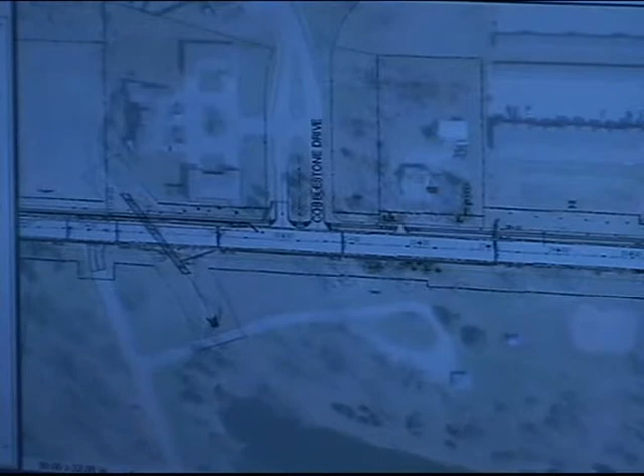There'll also be a new water main installed. Again, the old water main runs along the old alignment of Colorado Street. A new water main will be put in place along the new alignment, extending just east of Cobblestone Drive, then cutting back to tie into the existing Muscatine Power and Water main. Muscatine Power and Water had incurred a fair amount of water main breaks in this corridor, so that's one of the reasons they wanted to replace the main as well.

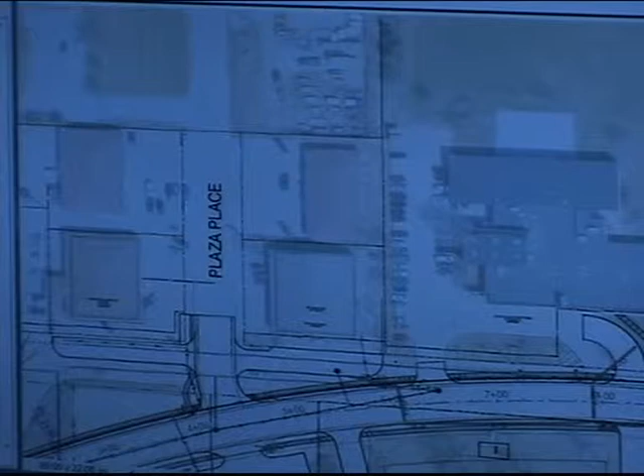One of the things we looked at in the design of this project was the multimodal aspects, the complete streets aspects of the project. That was a high priority with city staff, and we wanted to balance that against acquiring additional right-of-way and other things.

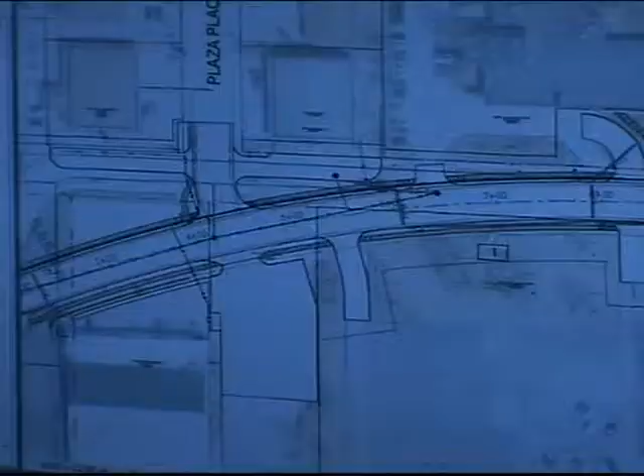As part of the project, there'll be a new 5-foot sidewalk on the north side, extending from Park Avenue all the way down to about 300 feet west of University Drive. That new sidewalk will serve pedestrians, connect to the Running River Trail, and be available for the more novice or inexperienced cyclists. More experienced cyclists can ride in Colorado Street, and with the wider section, should have more ability to have vehicles pass around them.

A new bus stop will be added right here at the end of the walk near Colorado Park, and I believe there's a fair amount of multifamily housing to the north of there.

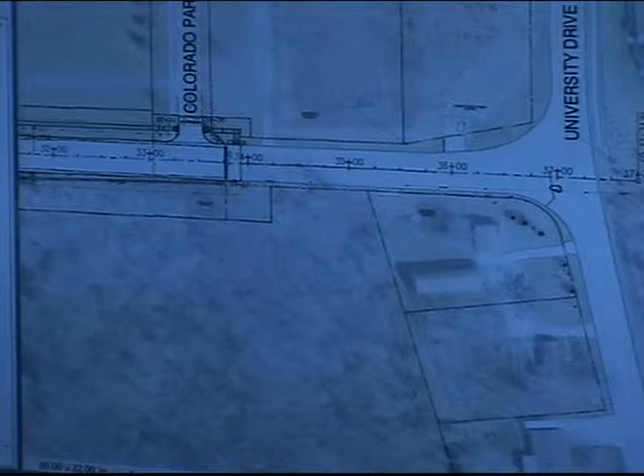I have a question related to the sidewalk, if you don't mind at this point? No, go ahead. Why are we stopping the sidewalk 300 feet from University?

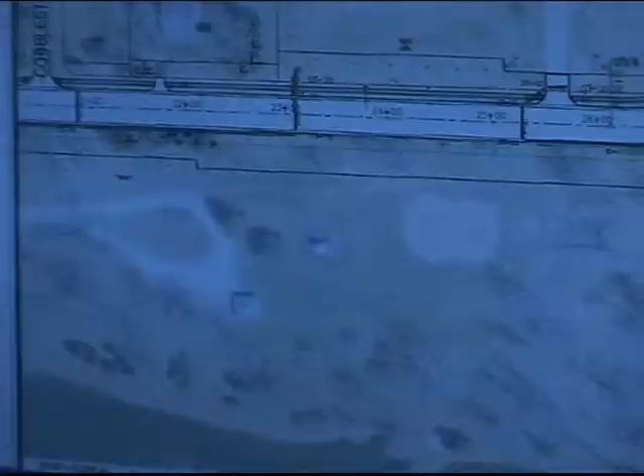Isn't there some sidewalk on University already? Is it just spotty? Basically it doesn't go anyplace, and we're trying to watch our costs as much as possible. We feel like when that area is developed on that corner, the developer will go ahead and finish extending the sidewalk in front of their property. Similarly, we at one time considered putting in signage at the entrance to Weed Park, a nice signage entrance, but we cut that out to try to keep our costs down on this project.

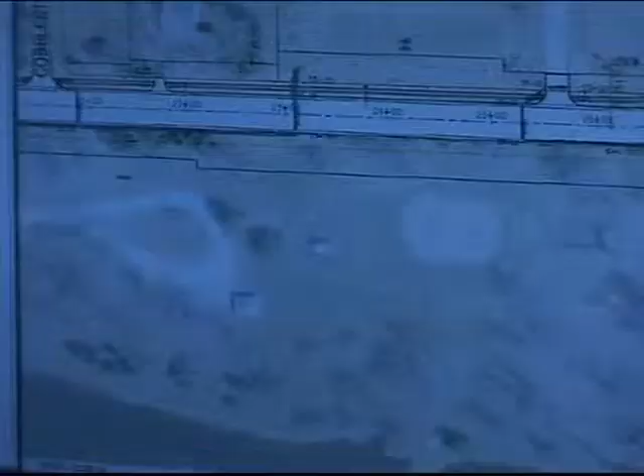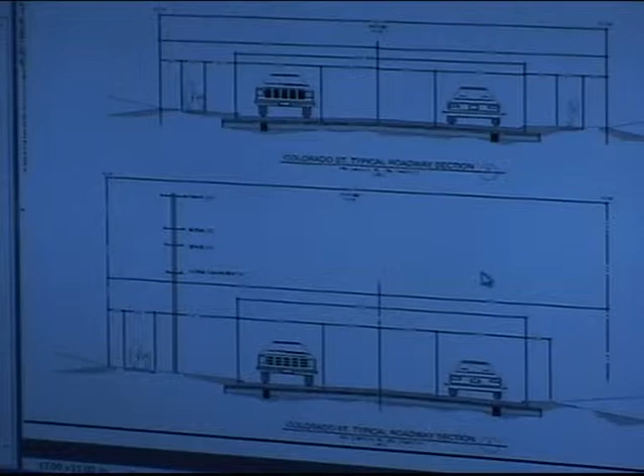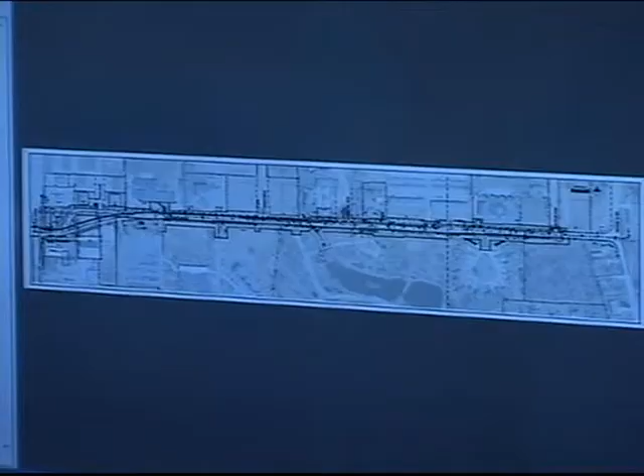I'll talk a little about how we anticipate the project will be phased during construction. There's always the possibility that a contractor may come in and say, because of the equipment I have, or I've got a way I think I can do this faster, if you let me do this or that—so there are always those kinds of discussions that can occur once a contractor is on board. But we want to make sure that what we're designing is buildable, so we give them a suggestion on how they can phase it so everybody has an opportunity to bid it the same way.

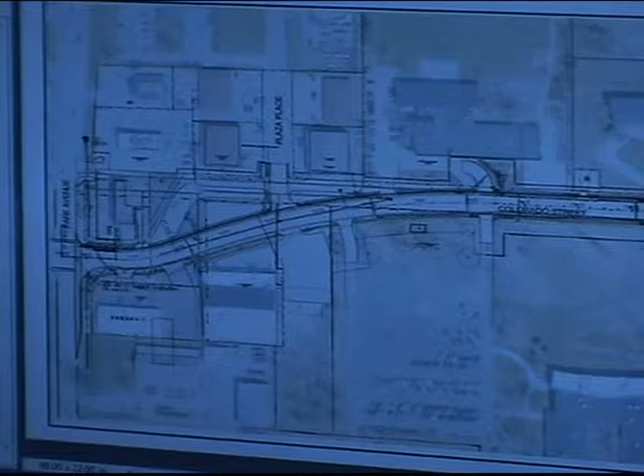What we propose is Phase 1, which could potentially start this fall, allowing for relocation of utilities and work off the shoulders of the road for building. As you get beyond the urban section that's in place now and go further east, where it's a 2-lane rural section, there'll be a need to fill in the ditches and build out into Weed Park.

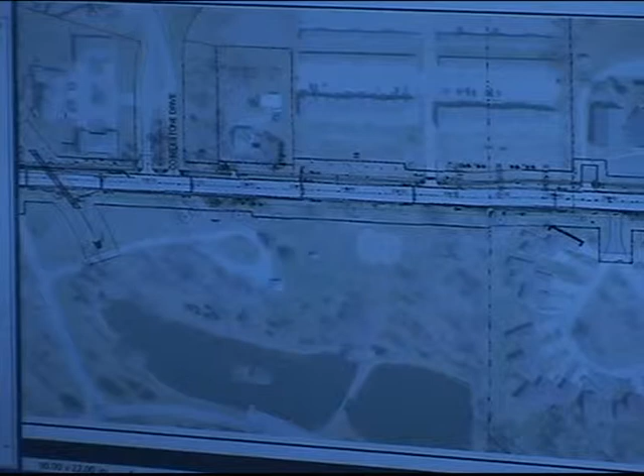The thought is that this work can occur anytime during the project, and we think the contractor will want to get into it as early as he can, since there's a need to widen the road for the new 3-lane section. So that's what we anticipate for Phase 1—utility relocation and off-the-shoulder work.

Phase 2 is installation of the box culvert, coming into Weed Park. We're anticipating about 14 days for that installation. What we're putting in is a precast box culvert, as opposed to a cast-in-place box culvert. So once the contractor is on board, he can talk to his supplier, have them pre-manufacture the box culvert, bring it to the site, open up the roadway, put it in, and close it back up and get out of there—versus a cast-in-place box culvert, which would take much longer. But during installation of that box culvert, there will be a need to close Colorado Street.

People will still have access for everyone, but they just won't be able to go straight through. People on the east side of the box culvert will have to come in off of University. People on the west side will have to come in off of Park.

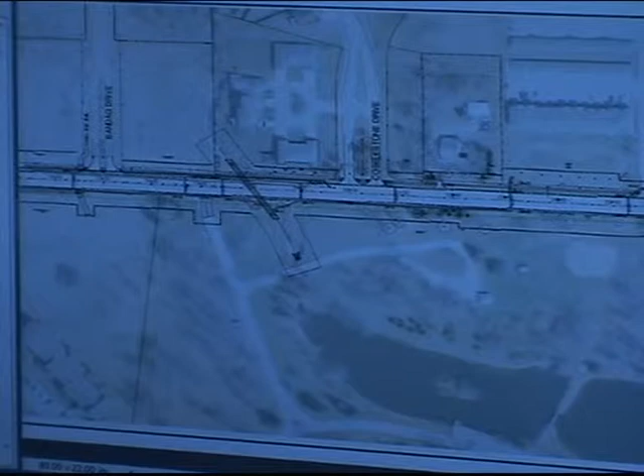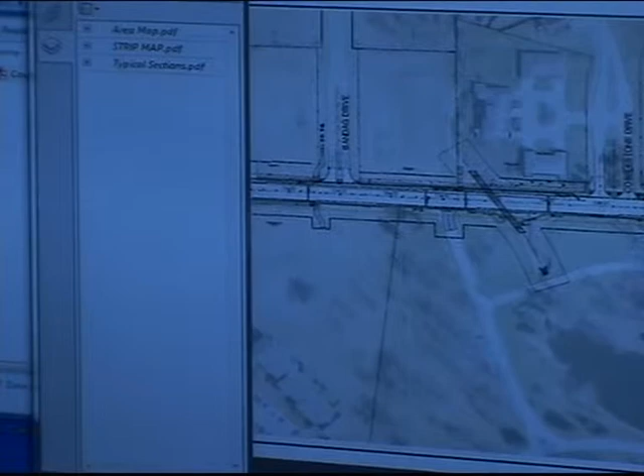Phase 3, which we anticipate occurring—let me grab that and slide it over.

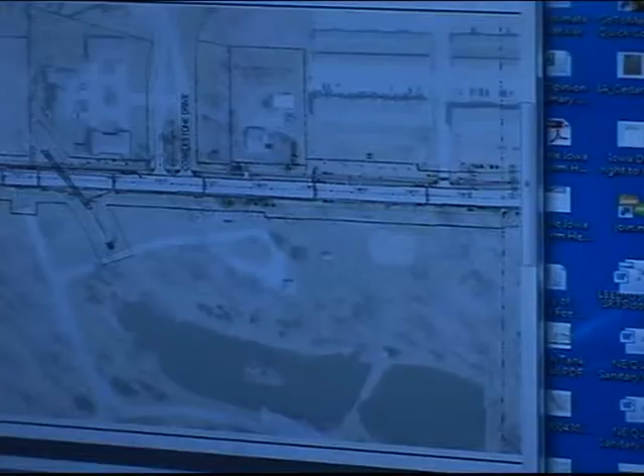We anticipate Phase 3 occurring in the spring of 2014, constructing the work from Park Avenue to Plaza Place. During that time, we again anticipate closure of Colorado Street between Park and Plaza. Access to all businesses would still be available, either off of Park, as in the case of the Come and Go or the Meineke, while the Plaza Place businesses would go up to Harrison, come back down Plaza Place, and get in that way. Pierce Furniture would also come around and access across that area.

Phase 4 would be the next phase, basically in front of the Colorado Street School. What we're calling for is that this work be done when school is out of session. It would start just before the old alignment of Colorado, if you will, grabbing it from around this point, and take it just to the east of the Colorado School.

During that time period, we anticipate the detour coming on the Colorado Street portion that's been constructed, up Plaza Place, over to Harrison, and back down on Bandag Drive. At the same time, people could go up Park and over to Harrison and down Bandag as well.

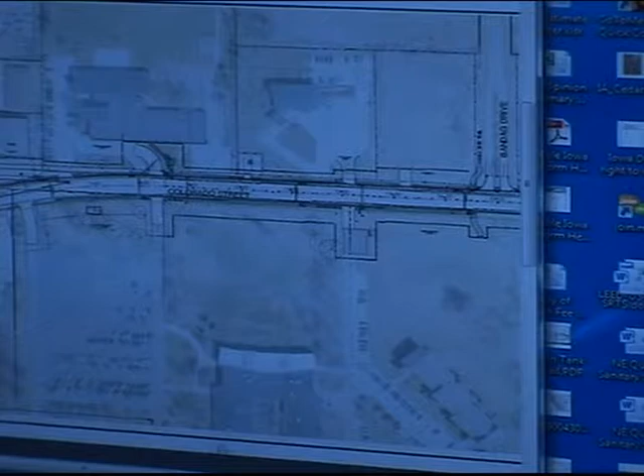Phase 5 is then the portion from just east of the Colorado School to the end of the project, to University Drive. We're anticipating they will construct the south half first and add some additional pavement on the north half, about 5 to 6 feet, to allow for two-lane traffic on that north half while they construct the south half.

During that time, we anticipate posting the road as closed to through traffic, local traffic only. We'd like to see the through traffic go down University to Washington, and then take Washington back up to Park. Any traffic we can get off there that really doesn't need to be on there would be a good thing.

Phase 6 will be the north side, and at that time there'll be two-way traffic allowed on the south side of the new roadway. Again, we would anticipate the same detour for through traffic.

Then Phase 7, which I'm not sure I have listed here, we anticipate as kind of that stop island right at the very end of the project at University Drive.

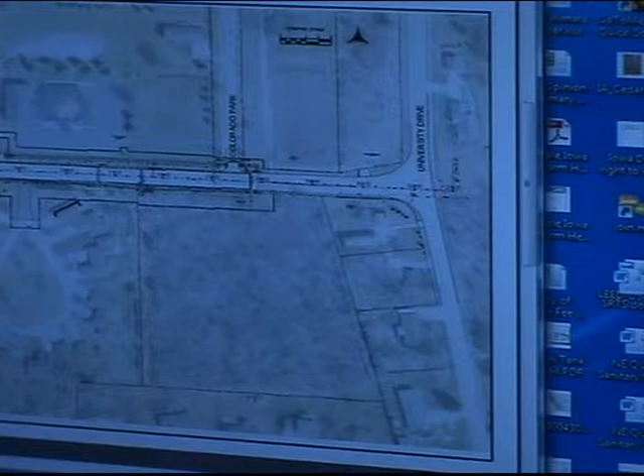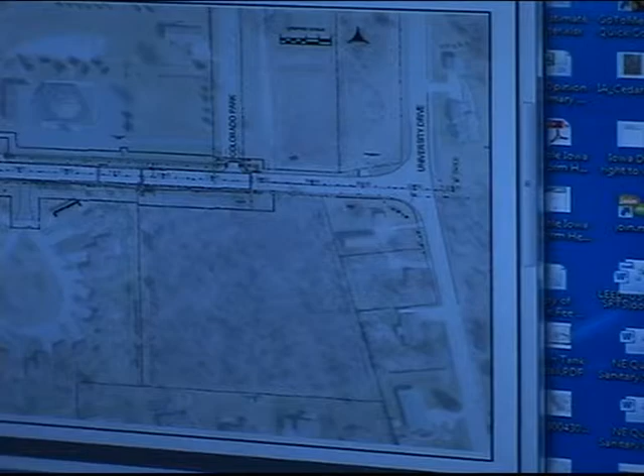The last page on my cheat notes here is the project statistics. Right now we anticipate the cost to be $2.95 million. That breaks down to the city's portion at $1.4 million, $1.2 million being contributed by federal aid the city has received, and we anticipate the water cost to be about $320,000 at this point in time.

We're hoping to have a letting in September of 2013. We have plans into the DOT and are awaiting their comments at this point. They've indicated this is a more complicated project than they typically see—they're more used to, I'll say, rural highway type projects. But our last communication with them has been the September letting, and we're on board for that.

With that, I guess I'd like to open it up for questions or comments.

What's going to happen to the bend that we're straightening out, so to speak? Does what's currently there become green space? There are a couple different options—one is green space, the second is to sell it to the adjacent property owners. Not all of it is ours; this grayed out section is private property, just this one parcel right in through here.

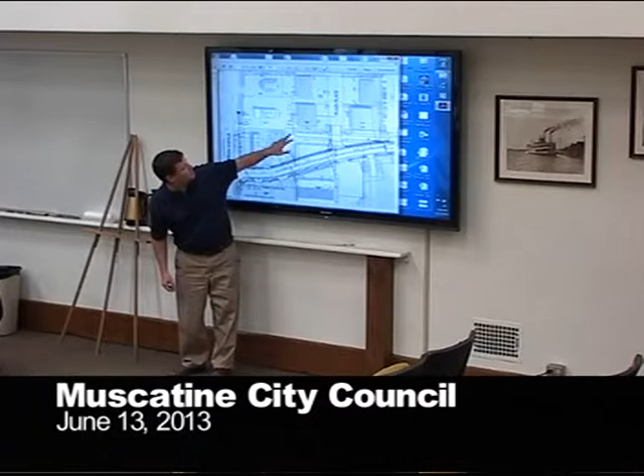Right now where Meineke sits, you have a tendency for some of those cars to pull out the back, turning right onto the road. That option will be gone. There'll be a parking area at the current design right here, but they won't be able to pull out of that corner anymore. There'll be two accesses onto the Meineke property—one located right at the eastern edge of their current property, and a joint driveway between the old Hardee's facility and Meineke. The two drives Meineke has now near the intersection of Colorado and Park will be closed.

I'm not sure if that answers your question. Good, yeah, that helps. Thank you. You're welcome.

Is it possible to get a copy of this PDF file so we could look into it closer? You bet—I can send it to Randy, or if you guys want to contact me direct, we can send it to you as well.

Could we squeeze a roundabout in there anywhere? I'm just kidding, just kidding. Colorado University works just fine. Yeah.

Council, any questions for Bob? Very good, thank you, sir. Thank you—again, welcome to Muscatine.

Item number 4 on tonight's agenda is a presentation on the city's flood preparedness plan, and I believe that's Randy Howell. And Randy Hill.